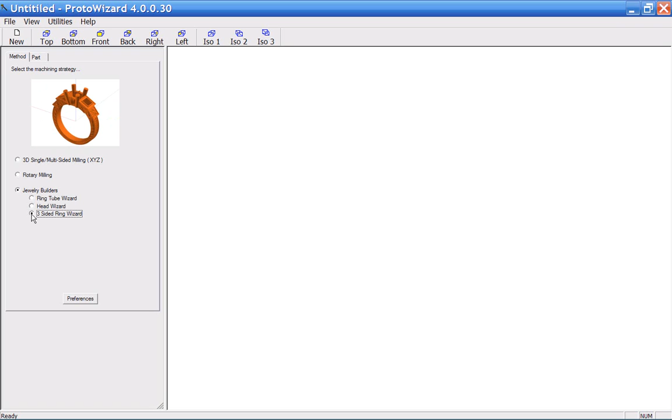ProtoWizard 4.0 Ring 1 Tutorial. ProtoWizard 4.0 has many new features. We have multi-sided ring cutting, rotary cutting, and many different jewelry builders, including ring tube, head wizard, and three-sided rings. In this tutorial, we're going to build ring number 1 out of our sample tutorials.

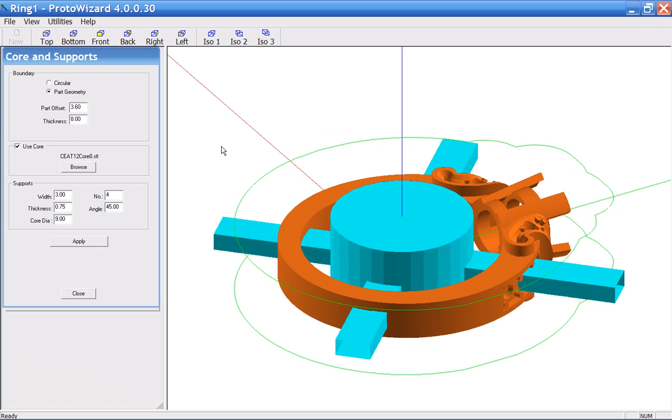First, select the file. Then you'll notice that the Core and Supports button is now activated. This must be selected before you can continue on with any other functions. Notice that in ProtoWizard 4.0, we now have a very optimized profile boundary all the way around the part. This boundary enables us to better cut the part in the least amount of time by following the exact shape of the part. This will become more important in other shapes.

Next, go to the Operations tab where we have planar cutting, curves, multi-sided, and rotary. Curves are not activated right now because there are no curves imported into this file. On rings, the first thing we're going to do is a multi-sided cutting. You can also use templates to either save away your operations to be used at a later time, or to quickly streamline the import of all the functions and operations that you might be using.

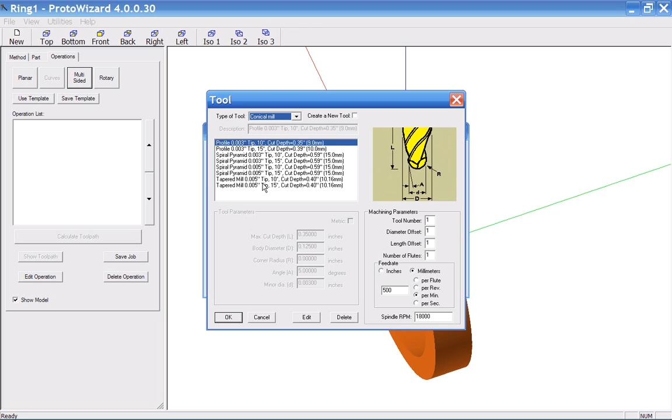The multi-sided function we're going to use right now is very similar to what has been used in the past. You select your tool, and notice that the tools can now be edited inside of ProtoWizard 4. This is a new feature that allows you to edit a tool on the fly without having to completely rebuild it. Now that we've selected our tool, you can enter in a description, a special one if you wish, or you can use the default two-sided rip.

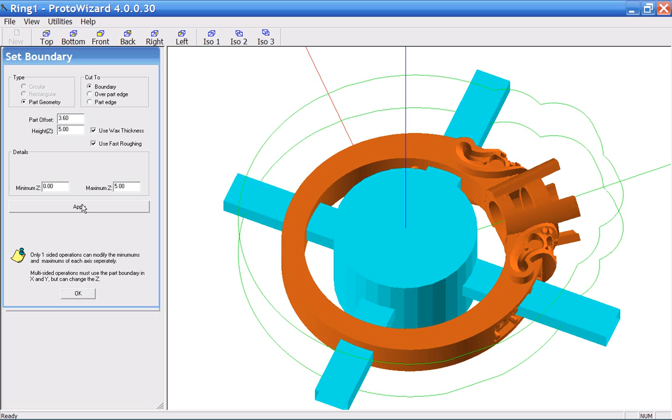Now it gives us a chance to look at our boundaries. We can now apply different boundary parameters to the part. In this particular case, we're going to cut all the way to the boundary itself, since this will be our roughing operation. Now that you've selected OK, you now assign this operation to a program. Since we haven't started any yet, program 1 is our default. So we'll add that to our operation list and hit OK.

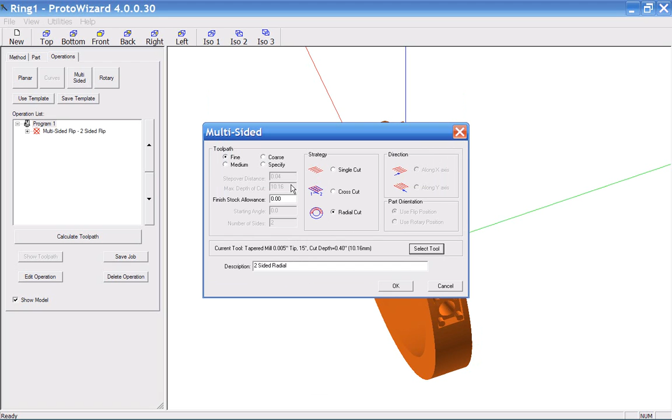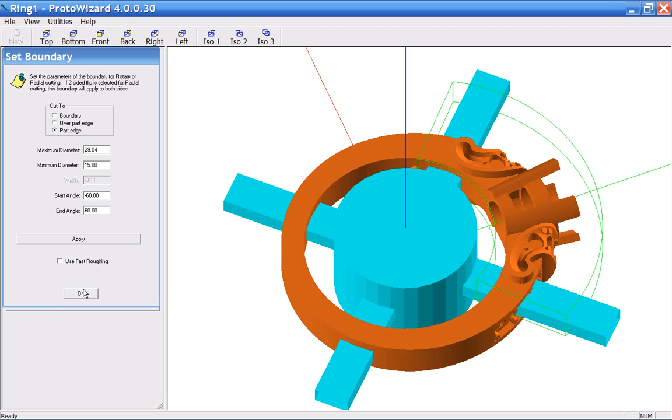Now the operation has been added to program 1, but we're nowhere near finished yet with this part. So let's select multi-sided again. However, this time we're going to do radial cutting, which is typically a finish type operation. So we'll go back and select our tool again, since we're going to use the same tool. However, this time we're going to change some of the parameters. We're going to tell ProtoWizard that we only want to cut to the part edge, and we only want to cut from -60 to +60 around this part. Hitting apply, you can now see your boundary zone that has changed around the part itself. We're going to continue adding this particular operation to program 1 because it's a continuation of the roughing passes that we have just completed.

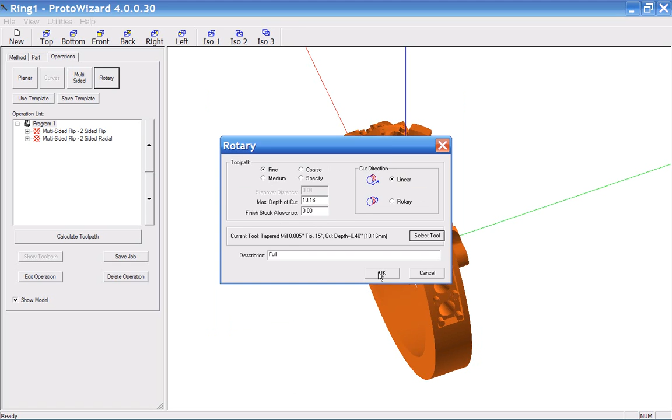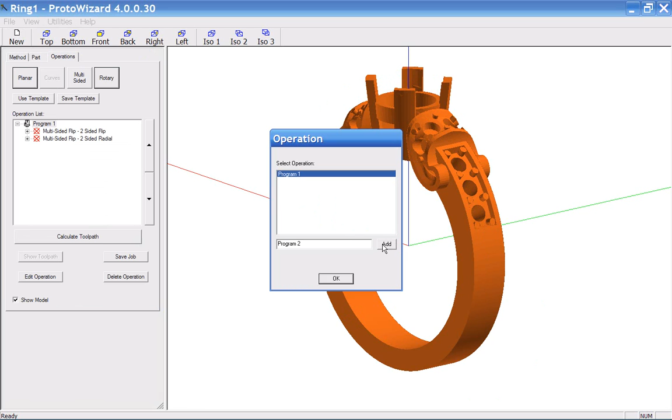Now selecting the rotary button, we can go in and assign a rotary function for the rotary part of this operation. Parameters are very similar to what we've used in the past. However, you can also assign a boundary in your rotary operation as well. Since this is going to be a full cut part, we'll go ahead and leave all the default parameters. However, we are going to cut to the part edge so we don't drop over the edge. This is a new optimized feature in ProtoWizard 4.

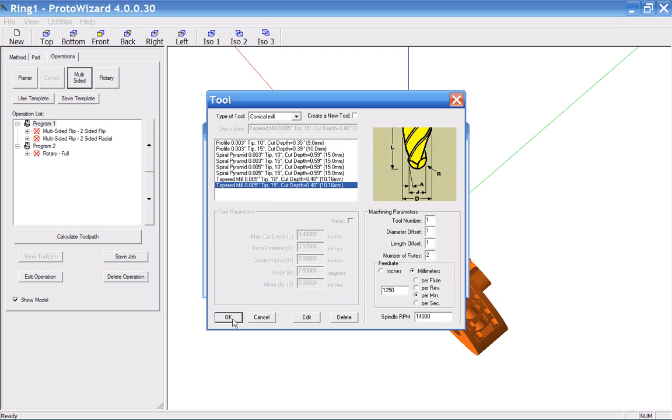There's one more thing we wish to do to this particular part. Because it has a deep bezel in the center, we're not going to want to cut that out in the rotary operation all by itself. So we're going to cut that out separately using another multi-sided cut. However, we're going to tell it that we wish to use the rotary position. And we're going to add this to program 2 with our other rotary cuts.

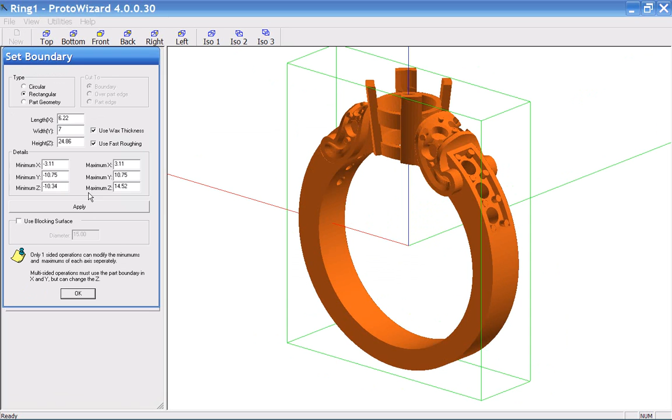Notice we're going to change to a rectangular cutting area, and we're going to restrict the cutting area to just around the bezel. We're also going to turn on a blocking surface and change the diameter of this surface to 17 millimeters to fill the full finger hole diameter. This will prevent the cuts from dropping past the ring and through the blocking surface.

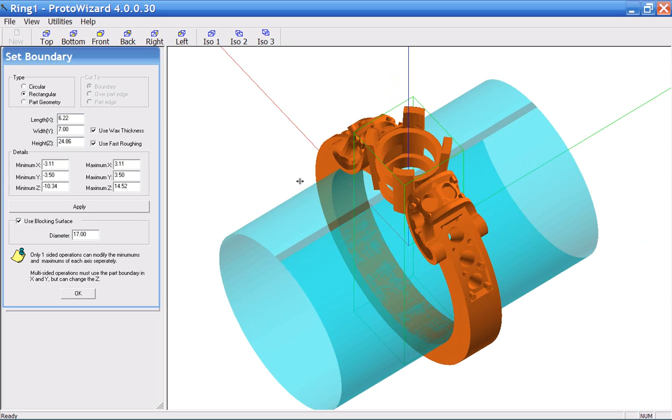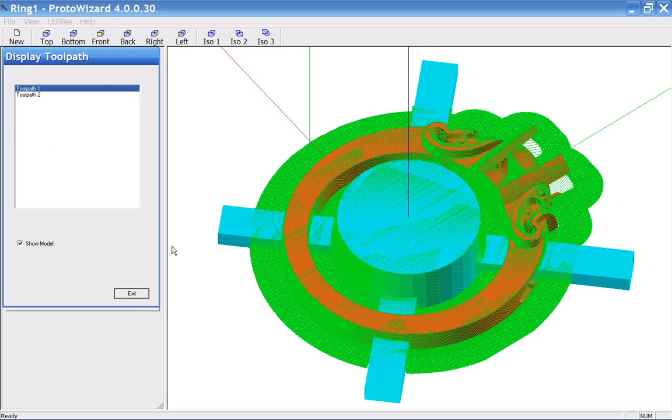We're going to add this to program 2 since this is part of our rotary operations, but we're going to move it up in our list so that this top-down multi-sided cut is done before the rotary cut. So that way the basket is completely cut out. Now let's look at our toolpath. Notice that our red X's changed to green check boxes that tell us the toolpath has been calculated for that particular operation. Here's our two-sided flip roughing passes.

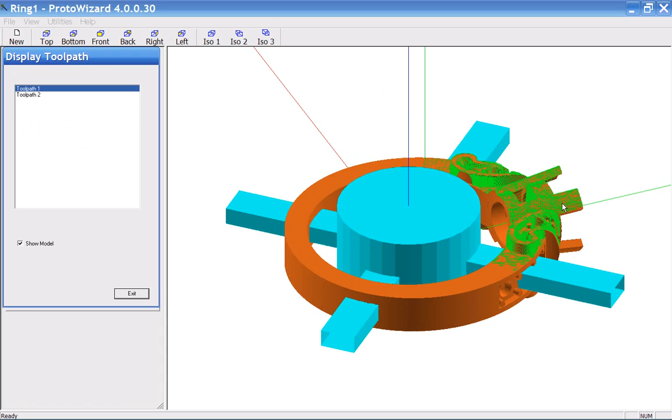Now let's look at the radial cut. Notice that the radial cut did not drop over the edge because we told it not to drop past the edge of the part. This is one of our new parameters that you can select to further optimize your cutting motion.

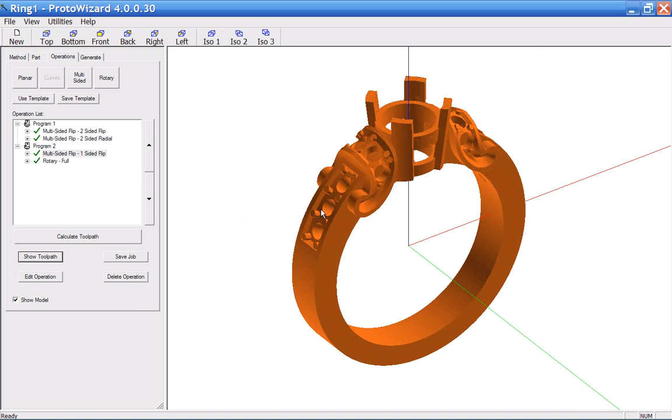Now we're looking at our top down, but I see that I forgot something. I forgot to tell it to do it in multiple passes. We don't want to cut all the way down this in one shot. We would like to do it in 2 millimeter increments. So we'll go back and edit this in 1 second. Let's look at our rotary cuts first. Once again, notice that the toolpath did not drop over the edge. Again, this is an optimization parameter that is now installed in ProtoWizard 4.

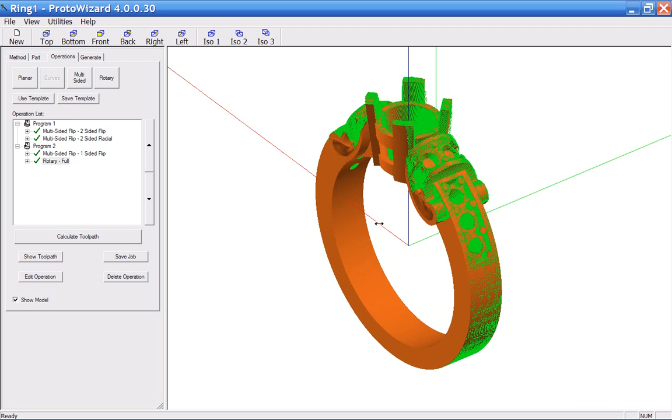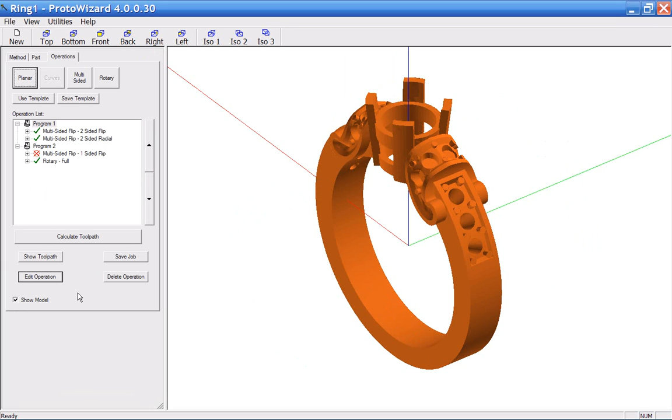Now let's go back and edit that one-sided operation in the top of our bezel. What I'm going to do is change my maximum depth of cut to 2 millimeters. So now it will break the operation up into 2 millimeter depths of cut all the way to the bottom of the cutting area, or in this case, our blocking surface.

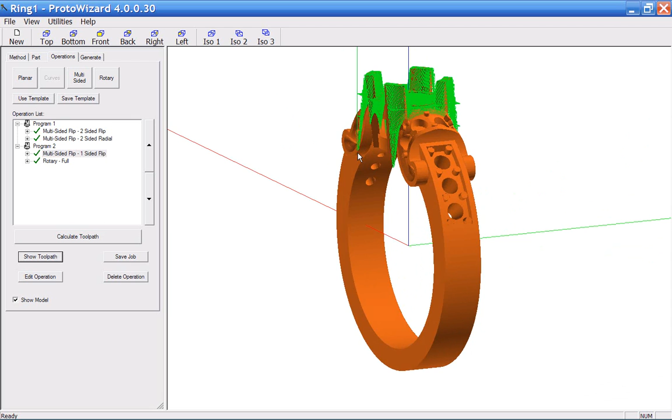Now if you review these cuts a little closer, you can see the levels that are left in the part itself. You can see that there were multiple levels of cuts that were made here. This is leaving the inside of the basket of the head itself stronger until the very last cut when all the material is finally removed. So it's only cutting 2 millimeters at a time. So this is a very good way to safely cut out large, deep basket areas on the heads or other areas of parts.

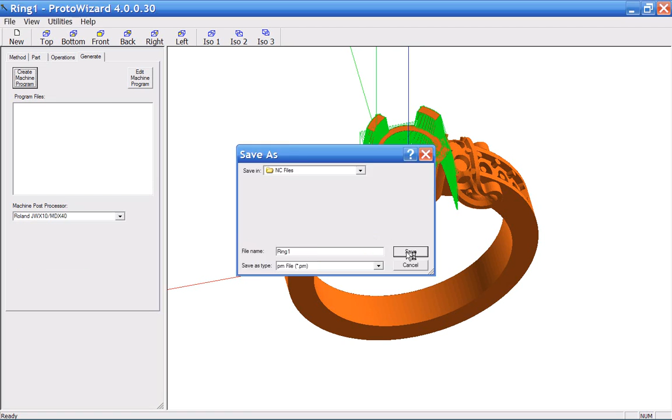Finally, all that's left to do is to create our NC file. You have your machine post-processor list here that you can select from. All you do is then click on Create Machine Program, and notice that the default file name is the file name of our part. This is perfectly acceptable because it's going to put out Ring 1, Program 1, and Ring 1, Program 2. And this is all there is to it.